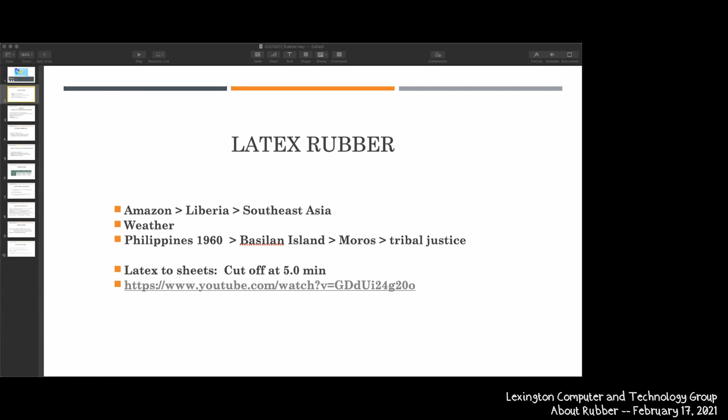And he's explaining to me on the way that one of the girls has been attacked by one of the boys. And she was, in fact, raped. And before we could get to the trees, they had taken him. They had amputated, castrated him, fed it to him, tied him to a tree, and he had bled to death. So that was tribal justice.

And that memory of that particular instance tells me volumes about Americans engaging in foreign policy.

Now, the purpose of all this is to get the latex into sheets. And when you see this brief video, one of the things that we'll talk about afterwards is that rubber basically comes from the plantation into the manufacturing sector in sheets, and they are either latex, still liquid, or they come in as number one sheet, number one smoked ribs, number two smoked ribs, or number three smoked ribs. And once upon a time, I was authorized to grade sheets. So let's see this brief video.

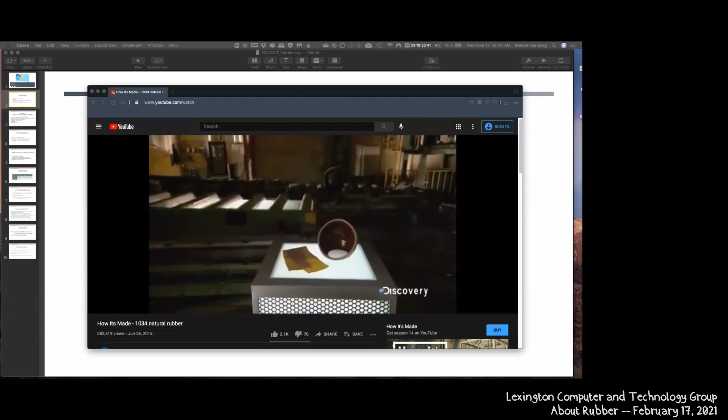Go full screen. Natural rubber comes from the milky sap of a tropical tree. Thousands of years ago, the native people of Central and South America discovered that the hardened sap was elastic and bounced. They played games with the balls of sap. When European explorers came along, it was soon a whole new ballgame. Today, we make thousands of useful things from the fluid that circulates through rubber trees. Everything from tires to balloons to boots.

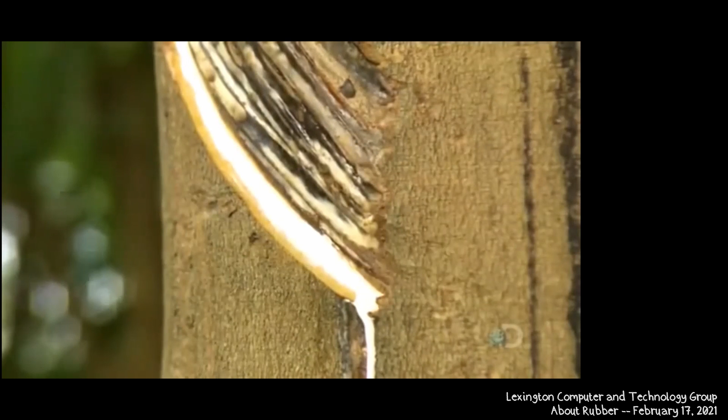The seeds are sown on plantations like this one in Thailand. It takes several years for the rubber trees to mature. Then the sap is ready to tap. In the coolness of the morning, when the sap flows freely, the farm worker slashes the bark with a hooked blade. The sap oozes from the abrasion. It spills onto a metal spout inserted below the slashed section. The spout funnels the sap into a ceramic cup below. It flows for about 5 or 6 hours, partially filling the cup. They wait a couple of days for the tree to recover and then tap another section of the tree.

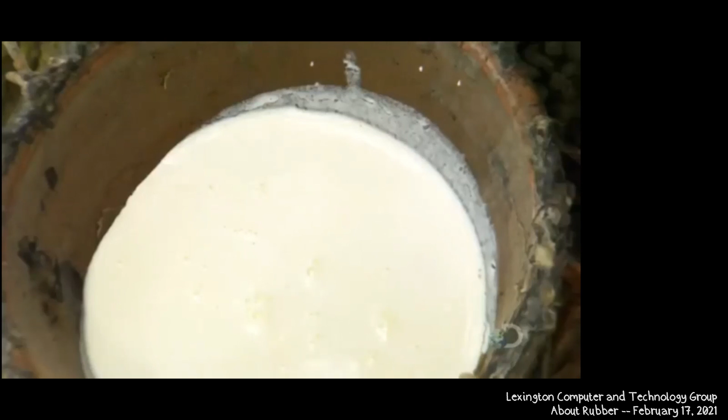After straining impurities, they pour the rubber sap into a plastic tub. They add formic acid and squish it around. The acid causes the sap to coagulate. After 15 to 30 minutes, it thickens to the consistency of tofu. This tofu-like sap has a sticky structure that allows it to now be rolled out like dough.

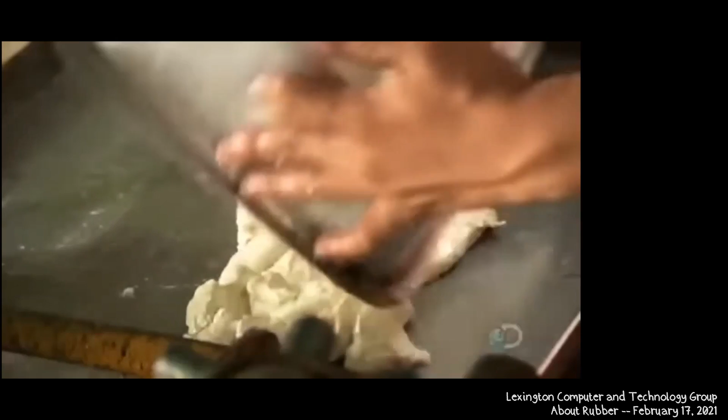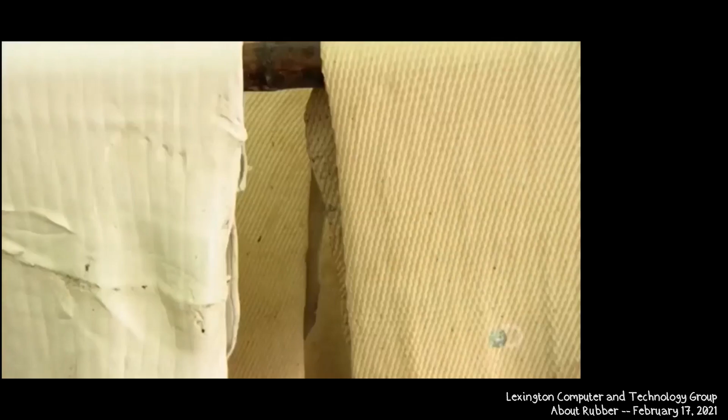The rolling squeezes out excess water and leaves a ribbed pattern on the sheets that increases the surface area to hasten drying. Then they rinse off the formic acid. They hang the rubber sheets to dry for about 5 hours. As they dry, the rubber thickens and becomes stronger, and the color darkens. The coagulated rubber sap has been transformed. In a few short steps, it's gone from a liquid to a solid.

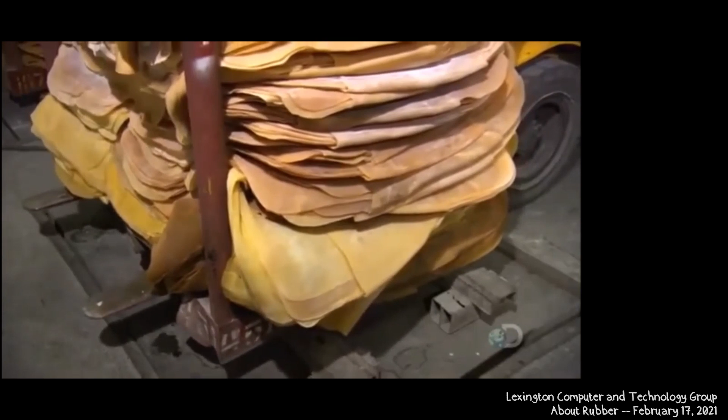Workers pile the rubber sheets onto pallets and weigh the load. There's a little over 1.5 tons of rubber in this stack. They store the stacks in a warehouse until the next stage of processing. When they're ready to move on, workers peel each sheet from the stack and soak them in water for about 20 minutes. This washes away some of the surface contaminants, but not all.

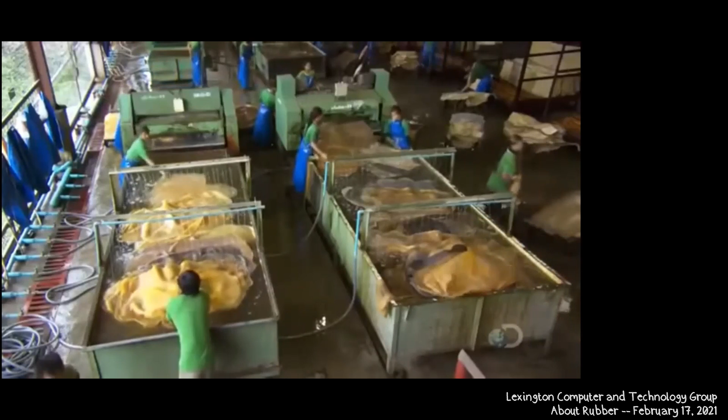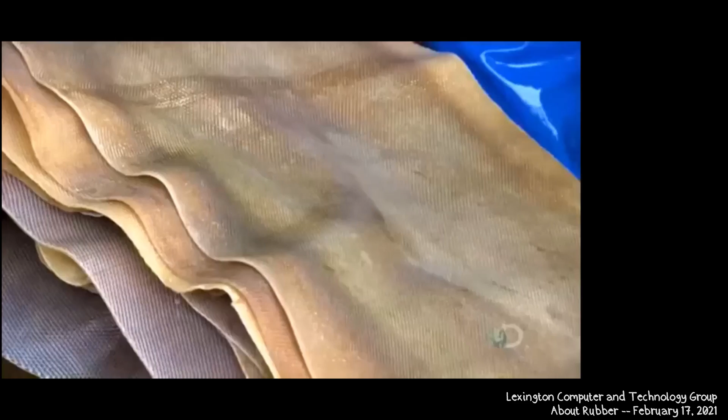The rubber sheets then go into a machine with many brushes that scrub off more of the dirt. After one more rinse, the rubber sheets are squeaky clean. As you can see, the color of the rubber sheets varies somewhat, depending on the tree they came from, their thickness, and other factors. They hang the sheets on racks to drip dry.

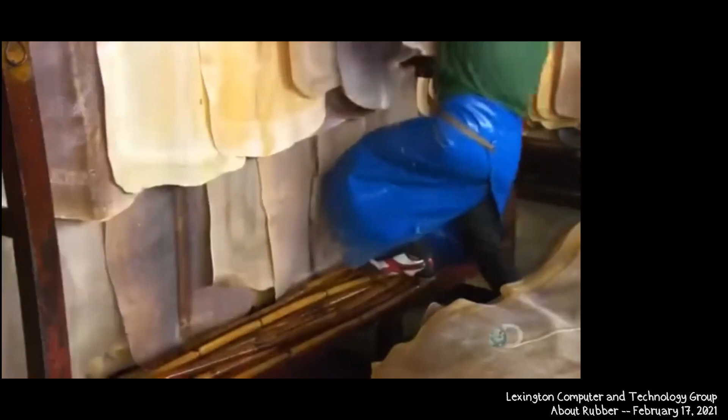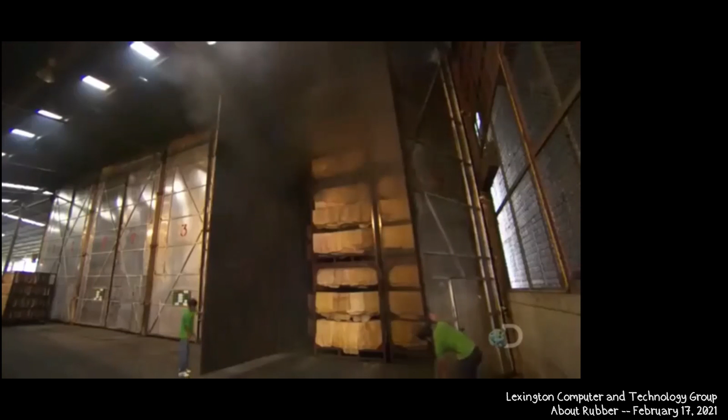They build a fire in a brick oven and smoke the rubber sheets in a chamber overhead for 5 days. It's a slow, low-temperature smoking that preserves the sheets to prevent the growth of mold. After smoking, they clip out contaminants like bark or insects that have become embedded in the rubber. In many cases, they can't get it all.

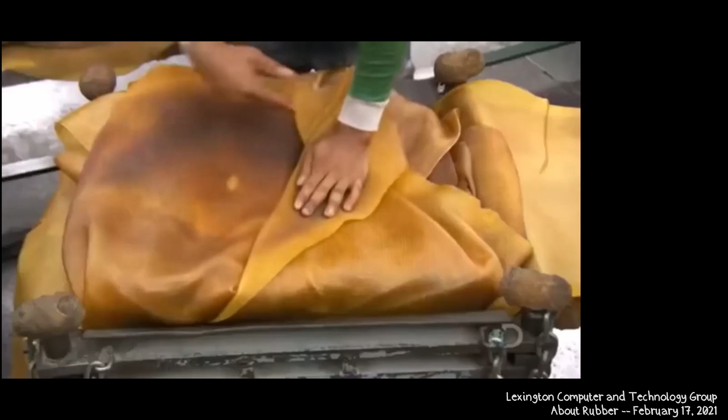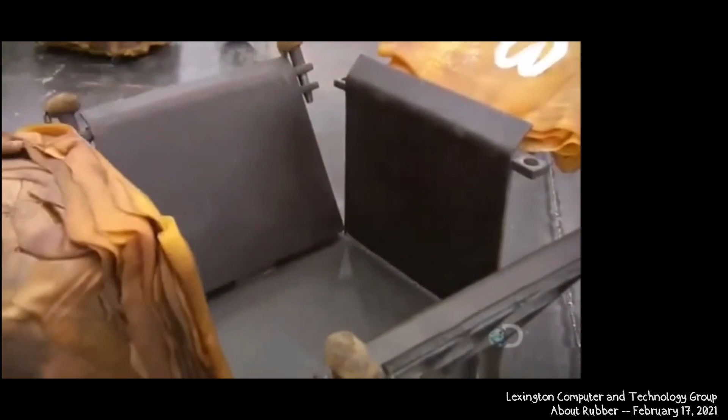They grade the rubber sheets by examining them against a bright light. Sheets with fewer remaining contaminants receive a higher rating and will command a better price. They stack the sheets according to the grade. And then it's into a hydraulic baler. It presses the stack of rubber sheets into cube form. The dimensions of the cubes conform to international packaging regulations, so they'll fit neatly into containers for shipping.

They spray the rubber cubes with a mix of calcium carbonate and solvent. The mixture forms a film on the cubes that prevents mold and keeps them from sticking together during transport. This rubber is now ready for the next factory and the next transformation. It could become almost anything.

George, what's the yield per tree per year? Oh, I have no idea. Okay. I just don't. If I ever knew it, I've long forgotten. Looks like they get 60 tappings a year from a tree, and what do they get? A pint a day. So that must be about 19 pounds.

George, you said earlier that the rubber was found in South America, right, and that in World War II, the difficulty was that the rubber came from the Far East. Does that mean that commercial rubber no longer came from South America? No, very limited. I don't know the difficulties of bringing the rubber out of the Amazon or why, but we were focused on the plantations in Southeast Asia by that point.

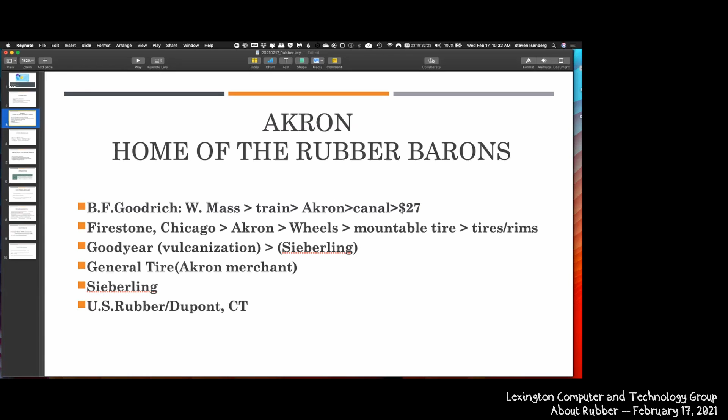So, George, to what extent do we use artificial rubber from petroleum? Pardon? I understand that we make artificial rubber from petroleum. Correct. To what extent, when we buy a tire or something like that, is it that rubber from latex or from petroleum? Okay, I will be getting into this in some more detail, but latex becomes what you consider rubber. Synthetic rubber can come to you almost the same. And most tires are blends.

So in the 1960s, when I was thick in this business, Akron was the home of the rubber industry. And the origin of that is right here in Massachusetts, because Benjamin Goodrich had a plant in the Springfield area of Massachusetts, and he wanted to expand. So he was on his way to Manhattan to try to raise money, capital, to expand his operation in Western Massachusetts.

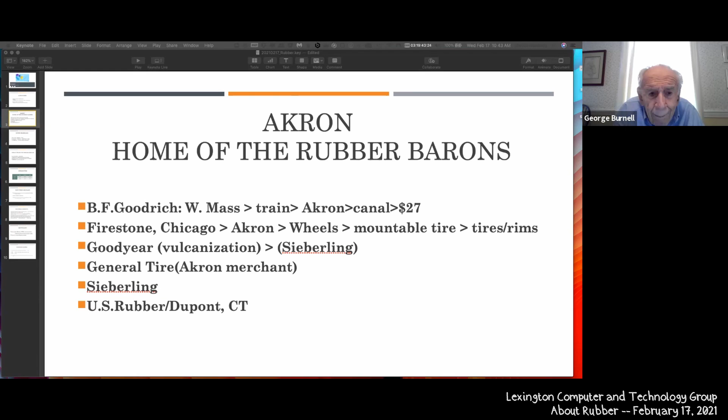So as this business develops, Firestone and Edison become personal friends. They're both developing, they're both scientific, and Ford. And those families go camping together in the Adirondacks. Goodyear ends up developing a relationship with the Chrysler Corporation.

And during the crash from 1929 to 1933, Goodyear delivered tires to Chrysler without getting paid for them for 4 years. Goodyear didn't start getting paid for those tires till after 1933. But when Chrysler put a car on the road, it had Goodyear tires on it. When Ford put a car on the road, it had Firestone tires on it.

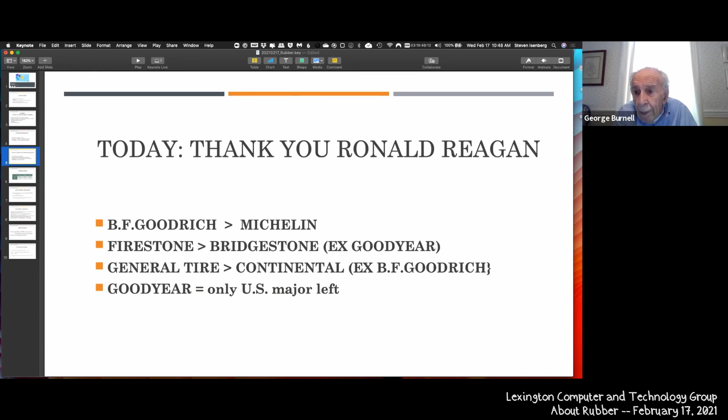So Bridgestone is ex-Goodyear, and we competed against those in the Philippines. Continental was the ex-BF Goodrich subsidiary. I was the tech rep to there. So that's gone. And Goodyear is the only major U.S. rubber manufacturer left. Next.

So there was a little saying in the industry, I had to slip it in here. But at that point in time, not today, but when I was there, Goodrich developed it, they had the strongest R&D in the industry. Firestone cranked them out. They made them. And Goodyear had the best sales organization. They could sell anything.

Now, the automobile that matched that, and the saying went, Chrysler designs it, Ford produces it, and General Motors can sell it. Yet during the development of the industry and the vehicle, the auto, and this is heavily the tire portion of this rubber business, Chrysler was out there first with various engineering activities, the airflow, the brake systems, front end drive.

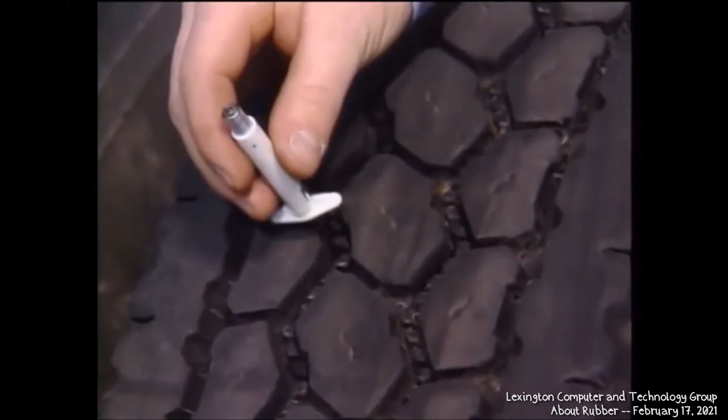Today's radial truck tires are masterpieces of applied technology. They have to start, stop, carry, and turn thousands of pounds of truck and cargo at speeds up to 75 miles per hour. And yet we also expect them to last for hundreds of thousands of miles. And we expect to retread them, a form of recycling, to make them last even longer. How can a tire do this? What gives it the extraordinary strength and staying power it needs? To find out, we'll look at what's inside it. Then we'll see what goes into the making of a modern truck tire. We'll start at the outside.

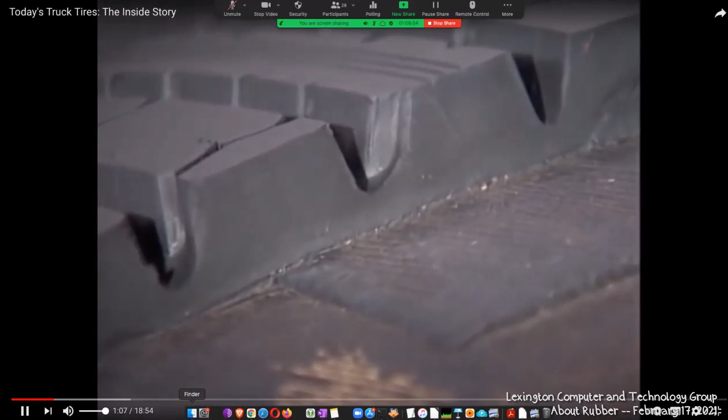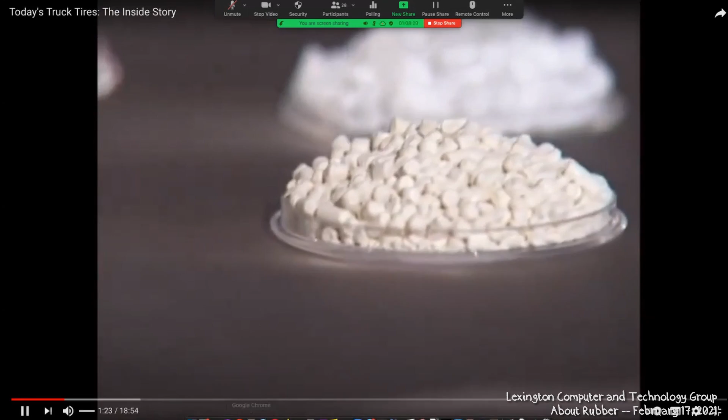The tread, of course, is a thick layer of rubber with a tread pattern molded into it. The rubber is application specific. That means each rubber compound is chosen for a specific combination of qualities, like fuel economy, wet traction, and cut and chip resistance. Treads are often a blend of natural and synthetic rubber because each has unique, desirable performance characteristics. Different additives, polymers, and other components provide strength and resiliency, along with resistance to wear and heat. All are combined, then cured in molds at high temperatures, changing the materials, bonding them together chemically, and forming the tread. The tread pattern is designed to optimize traction and wear. It must grip the road, wet or dry, because the tire controls the traction forces for the truck.

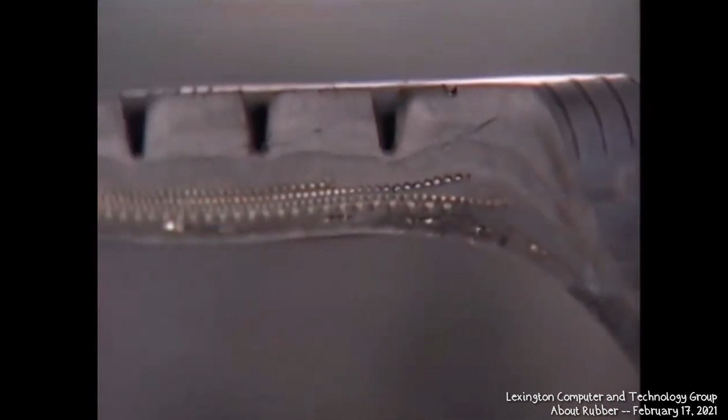But even a tread isn't as simple as it looks. When we cut through it, we see different shades of color in the rubber. Why is that? Well, in most Bridgestone tires, 2 different layers of tread rubber are used. Each has a slightly different color because each has a slightly different composition. The top layer, called the cap, is designed for long, slow, even wear. The layer below, the base, is designed to shield the casing from heat generated as the tire rolls down the road. Heat is the enemy of tire casings, shortening their life. Because retreadability is so important for truck tires, heat must be controlled, and that's why cap and base construction is so important. As we dig further, we find a layer of rubber called the undertread. The undertread provides additional protection for the casing and also helps form the bond between the tread and belts. Different thicknesses of undertread are used, depending on the amount of off-highway service or regrooving required.

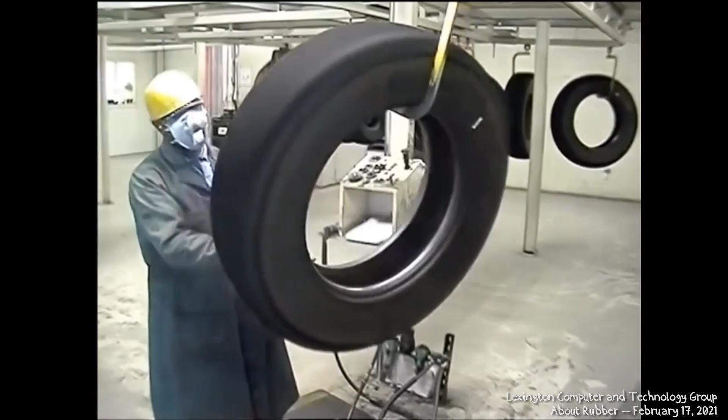From this point on, we're looking at what we call the casing. This is the part of the tire that gets retreaded once the original tread is worn away. Below the undertread, we find layers of steel cables and rubber. There are usually 3 or 4 of these belts and a body ply in a Bridgestone truck tire.

The job of the belts is to hold the tread flat against the road. Without them, the casing would take on an inner tube-like shape. Footprint pressure would be uneven, and the result would probably be poor traction, poor stability, plus rapid and irregular wear. Steel belts also help tires resist penetration by nails and other road hazards.

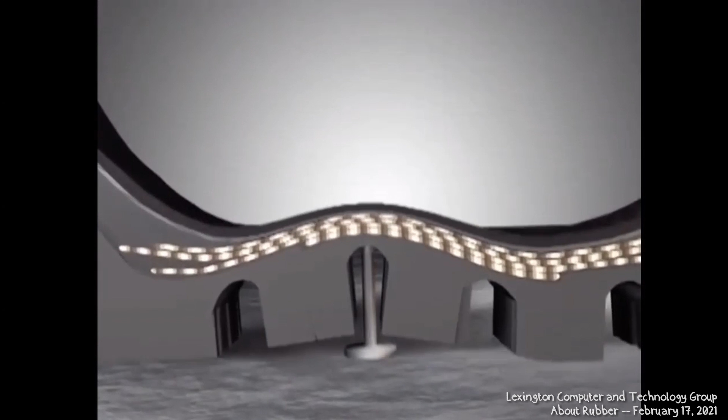The cords in each belt run at different angles. That distributes forces evenly and provides great strength. Like the rubber, the steel cord is application specific. Different alloys, different tensile strengths, along with different ways of winding the cords, are used to produce exactly the performance characteristics needed in each part of the tire.

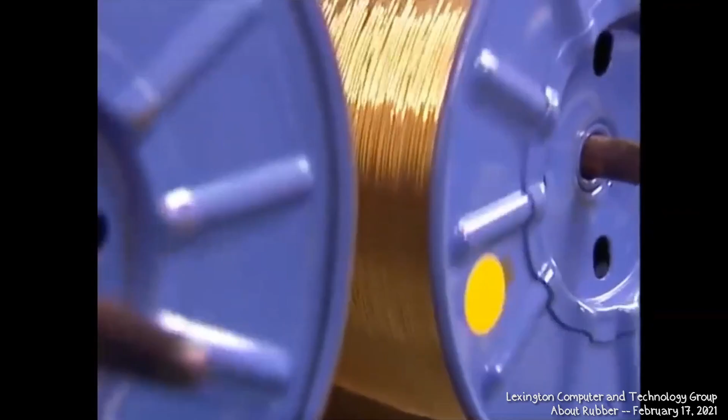Both steel and rubber are specially made to help them bond to each other. Steel is treated with the metal cobalt and brass formulations to help the steel and rubber bond tightly. The rubber that surrounds the steel cords maintains cord spacing and seals out moisture that could cause rust, which could break the bond with the rubber.

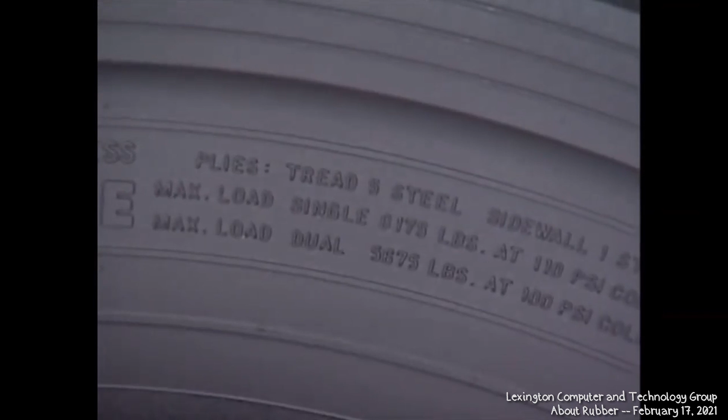And steel adds enormous strength. Long ago, a 14-ply rated tire needed 14 cotton layers. Today, just 3 or 4 steel reinforced layers in the belt package, plus 1 layer of body ply cords, do the same job. Beneath the belts, we find another combination of rubber and steel.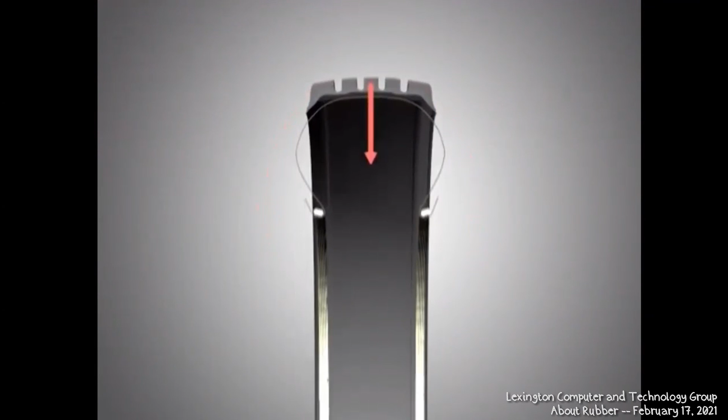We notice that these steel cords run at right angles to the tread, and they run radially down the sidewalls of the tire. It is this cord direction that gives the radial tire its name. If you draw a line from the center of the wheel to the tread, a radius, you see that these radial lines match the steel cords, hence the name radial tire.

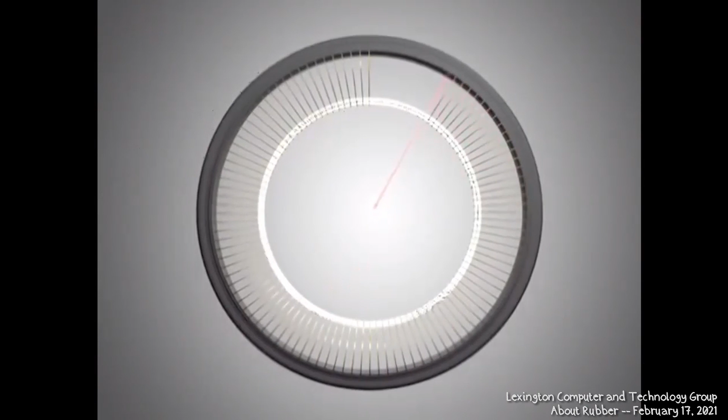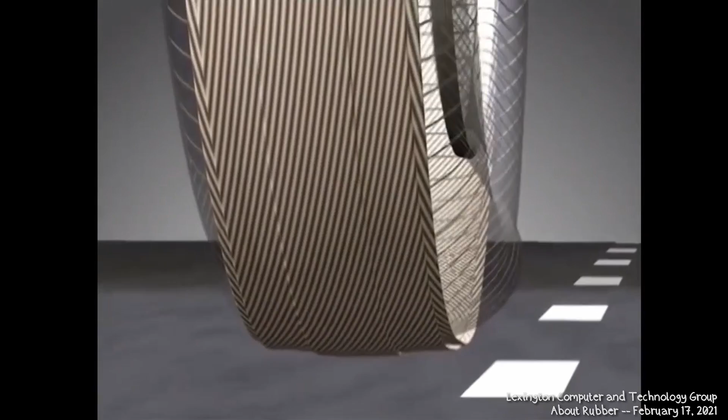As a group, these radial cords are called the body ply and run all the way around the tire. A typical truck tire has approximately 1,200 of these. Each cord runs from bead to bead. As it does, it forms part of the sidewall. The sidewall does most of the flexing as the tire rolls. Sidewalls flex about 500 times per mile and hundreds of millions of times over the tire's life.

By flexing and changing shape, the steel, together with the compressed air inside the tire, helps absorb shocks from uneven road surfaces. The sidewalls transmit steering, driving, and braking forces from the wheels to the tread, as well as forces from the road to the suspension system.

Although sidewalls don't get the kind of wear treads do, they are exposed to the elements. So sidewall rubber uses special compounds and special additives to protect it from UV light, weather, aging, and curbing. As the body ply cords continue toward the bead of the tire, they suddenly turn completely around the bead and start back up the sidewall. This is called the ply turn-up because the cords actually turn up and head back the opposite direction.

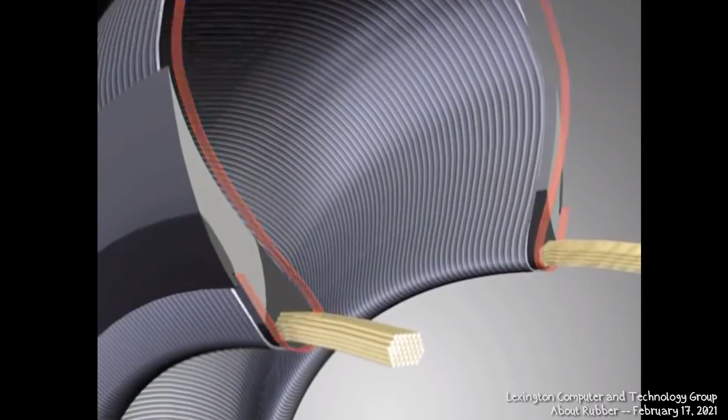Inside the turn-up is a band of many strands of steel wire called the bead bundle. The body ply wraps around it. The space between body ply and bead contains several different kinds of rubber and fillers. Each is formulated to add strength while giving the area stress resistance.

The bead is the edge of the tire, you might say, the place where the tire makes contact with the wheel. The bead creates a tight seal between tire and wheel. Since the entire inside of a tire is open, it is the compressed air that forces the beads against the wheel flanges, sealing in the air.

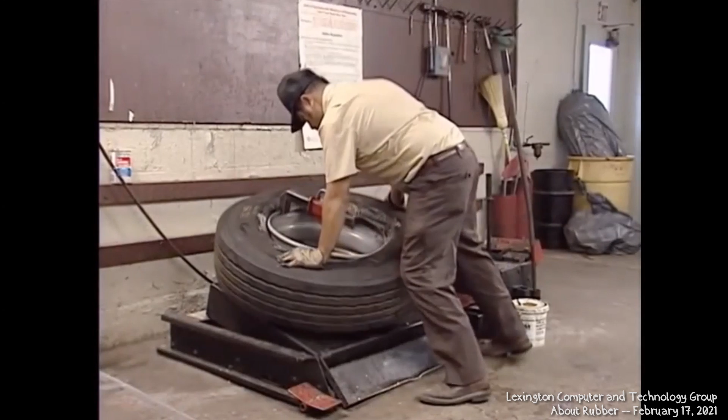There's also a small additional component made of wire or wire and fabric called a chafer. It covers the bead bundle and ply turn-up. It provides protection against damage that might occur when the bead is forced over the edge of the wheel and as the bead moves against the rim flange. Also protecting the bead area from abrasion is a tough rubber compound that helps make beads more rigid for further damage protection. But we have one more component to go.

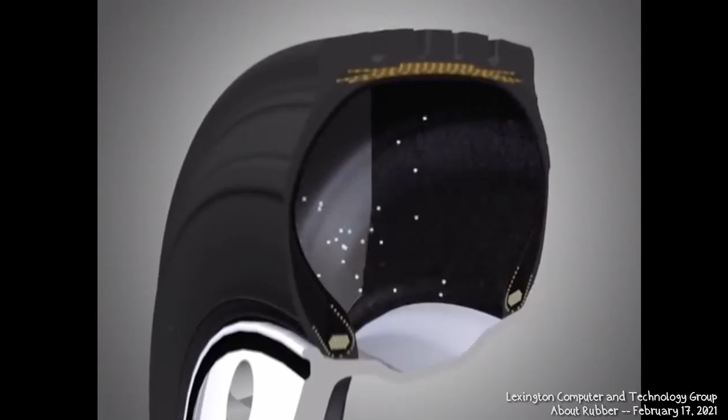Air molecules are tiny and can literally diffuse through rubber, causing the tire to lose pressure. To slow this, the inside of the tire is covered with what is called an inner liner. This is yet another layer of rubber. Though it's thin, the inner liner actually has 2 or 3 separate layers. One layer prevents air and moisture from passing through. The other helps it bond to the casing ply. 2 more rubber compounds, each with a specific job.

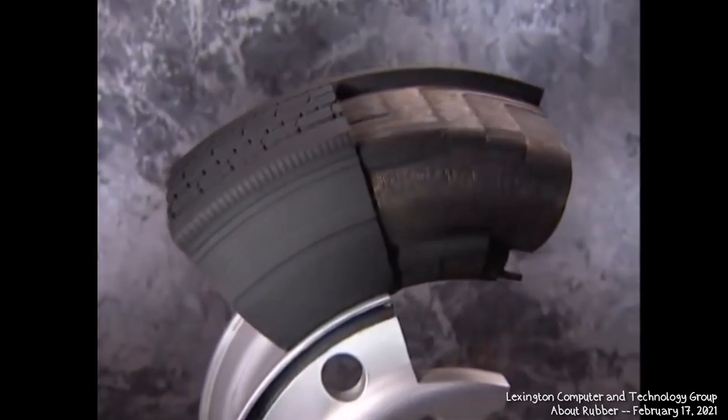Still, even with the best inner liner, a tire can lose 2 psi per month. Another reason to check inflation pressures regularly. We've seen all the major components of a modern radial tire. Now, how is a tire like this actually produced? To find out, we'll visit a Bridgestone Firestone truck tire factory.

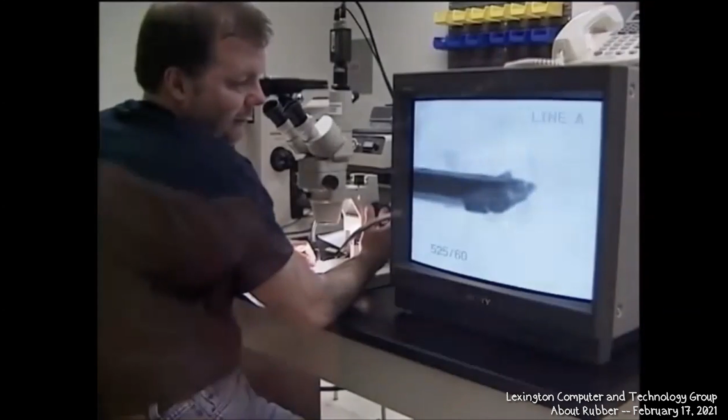As we've learned, the basic materials are rubber and steel. About 70% of the rubber in a truck tire is natural rubber, which comes from the sap of rubber trees. About 30% is synthetic, made from petroleum and other materials. Specially made steel wire of a variety of types and thicknesses is used in the belts, body ply, and beads.

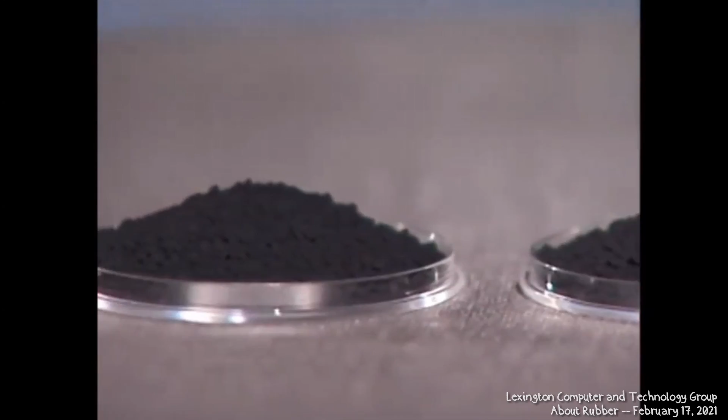And there are several specific additives used to help in processing, curing, and strengthening rubber, and in protecting tires against air, sunlight, and ozone. Silica, which is related to common sand, can be added to reduce heat and rolling resistance to improve fuel economy. Different grades of carbon black can also create different performance characteristics. And many secret ingredients can have almost magical effects on how a tire performs.

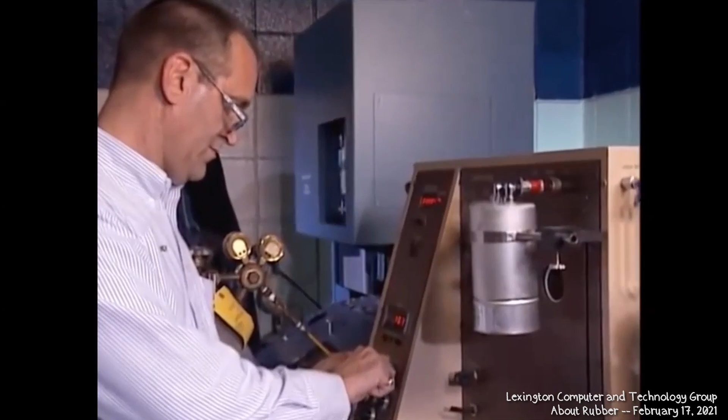Quality control begins with the incoming materials. Every batch of rubber, every bit of steel, every additive, even the water is tested, first by the supplier to make sure it meets Bridgestone specifications. Then it's tested again by Bridgestone Firestone technicians to verify its quality.

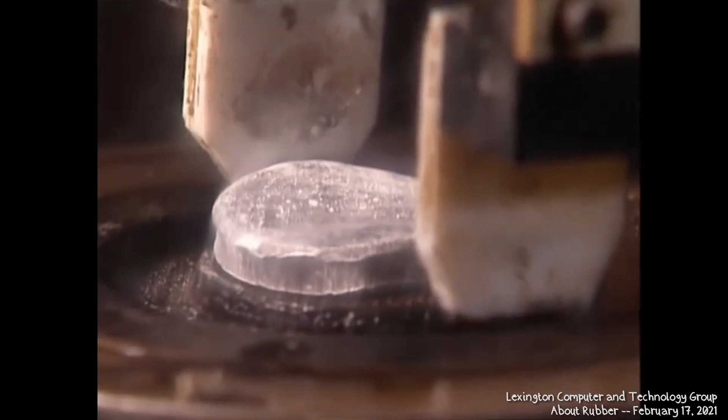And as materials go through the process, they are tested repeatedly to make sure they will perform properly in the finished product. Both chemical and physical properties are checked. We need not only the right materials, but the right strength, flexibility, size, and other characteristics. Nothing can be used to build a tire until it has been tested and approved.

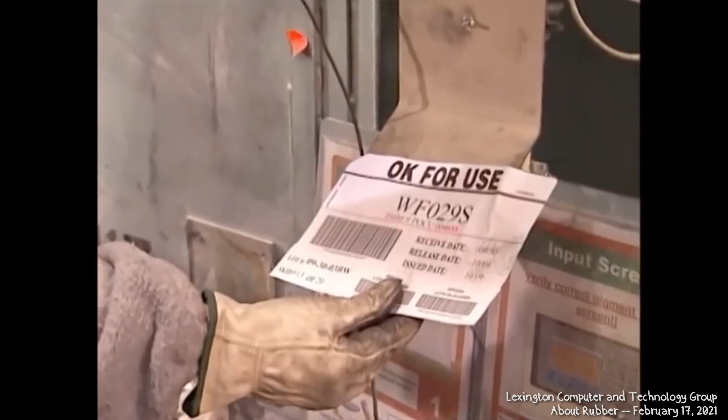Each of the many different rubber compounds is mixed separately. Careful weighing assures precise formulations. At this stage, though, rubber is tough stuff. To mix a batch, you need powerful mixers. These Banbury mixers have 4,000 horsepower motors, enough to power more than 10 semis, and can handle half a ton of rubber at a time.

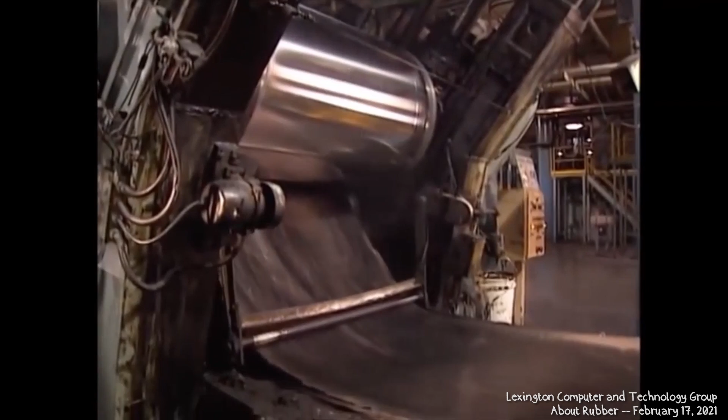Once rubber leaves the Banbury, it is squeezed between heated rolls called mills. It comes out of the mills in sheets, which may be put back into the Banbury again and again, depending on specifications set by the chemical engineers. And this has to happen for each of the different compounds used to make a tire.

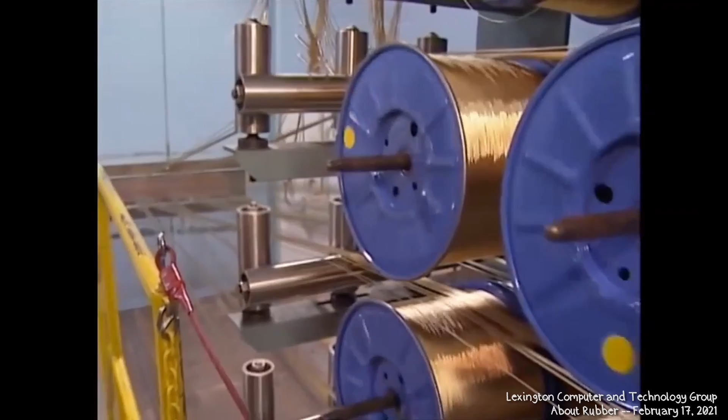Steel is used to make body plies and belts. Multiple strands of wire already wound into cords must be aligned and bonded to rubber. Nearly 1,000 strands pass through guides before being sandwiched with rubber in a machine called a calender. Powerful heated rollers press rubber onto and between the cords. The result is a sheet of steel-reinforced rubber. These sheets are then cut at the precise angles needed to make body plies and belts.

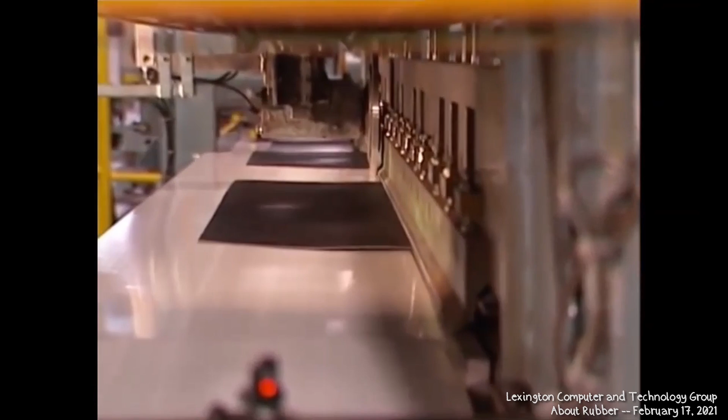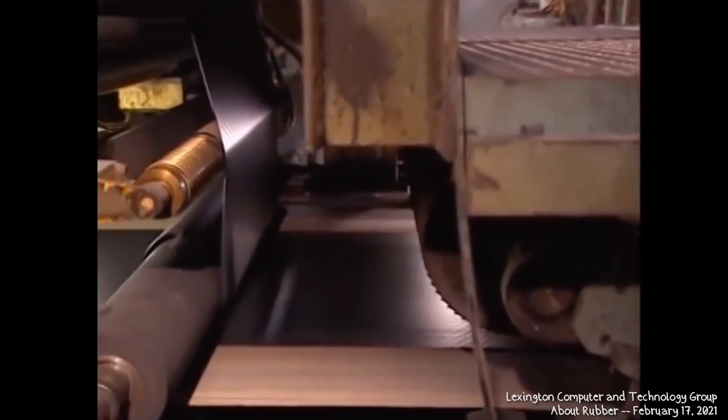Quality control continues in every part of the process. Throughout the plant, giant poster-like charts provide operators with checkpoints for each step in manufacturing. Every critical step is checked and verified before work can proceed. The inner liner, another sheet-like material, is also made using a calender, but it contains no steel. And the other thicker wire will be coated with rubber and wound into sturdy rings that become the beads.

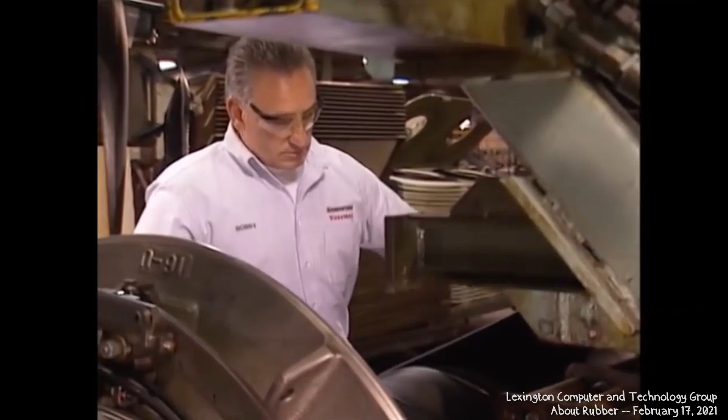Many rubber components are made by extrusion. The largest of these extrusions is the tread, but many smaller ones are used in making parts of sidewalls and fillers. Up to now, we've been making parts that will be assembled to make the actual tire. A person called a tire builder assembles these parts using a tire assembly machine. This is the heart of the tire manufacturing process.

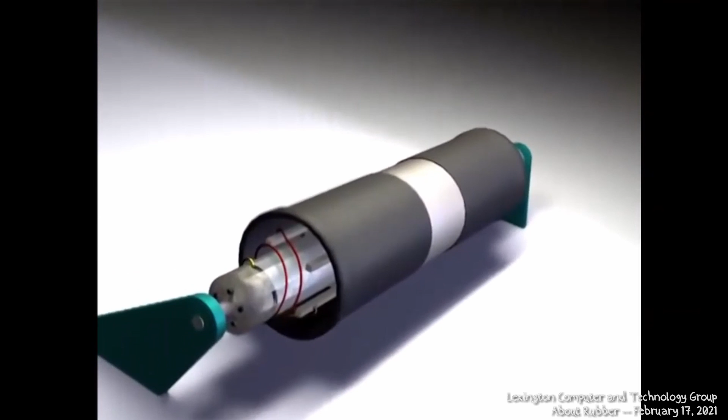Every component is identified and tracked using barcodes. Specifications in computers at each building machine make sure only the right components get used. To make what happens as clear as possible, we'll use animation to simplify and slow down the process. Basically, the parts are laid out on the surface of a big drum.

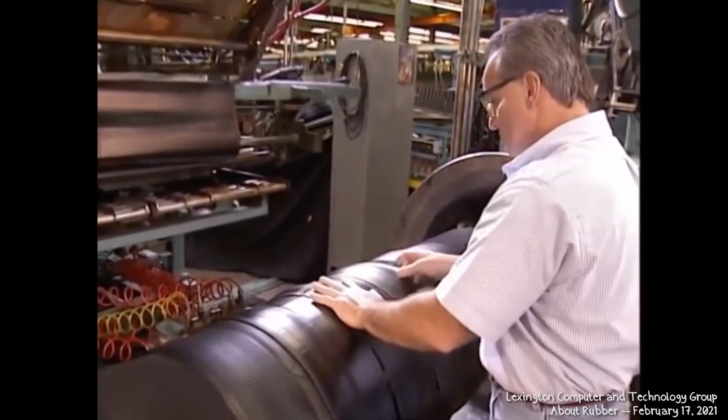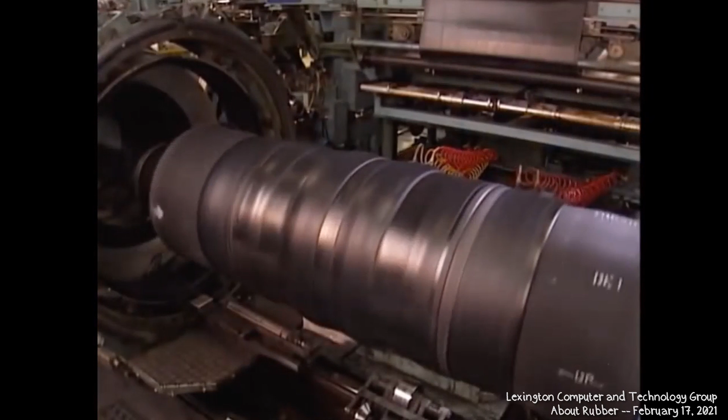We begin with the wire bands that form the beads. The sidewalls go on next. Then the inner liner is added, followed by the chafers and body ply. With the exception of beads, each of the components has to be matched end for end and spliced together. But it still doesn't look much like a tire. That's where the magic of the tire assembly machine comes in. A bladder inside this new tire is inflated. Then the belts are put into place.

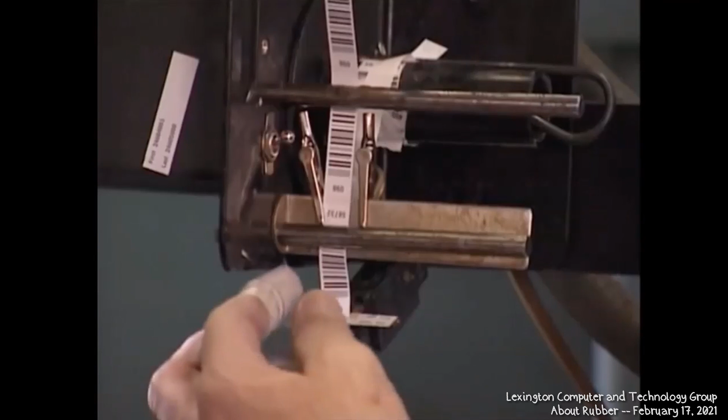And finally, the tread is attached. Bladders on each side inflate, pushing components into the characteristic tire shape. The sidewalls and body ply ends are folded around the beads and pressed firmly against the sides of the tire. A barcode is applied, identifying this tire, the operator who built it, and every component in it, so any irregularity can be tracked back to its source.

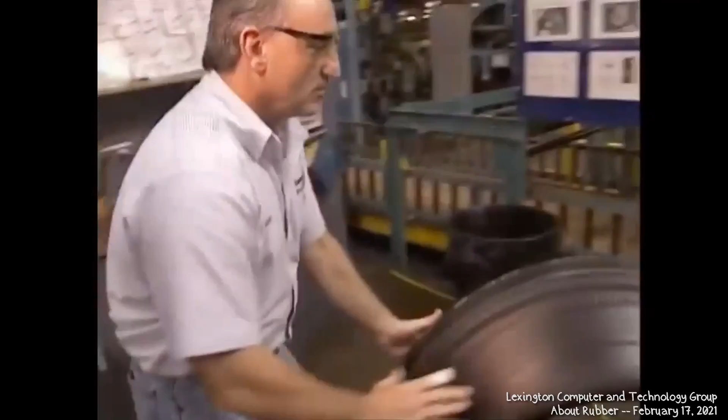Special rollers press all the components together, a process called stitching. Because the rubber is still uncured, the various parts are soft and stick together easily. The result is something that looks remarkably like a tire, but it's not cured, so we call it a green tire. We still have to create the tread pattern and sidewall design and vulcanize the components. That's done by giant heated presses that contain the molds.

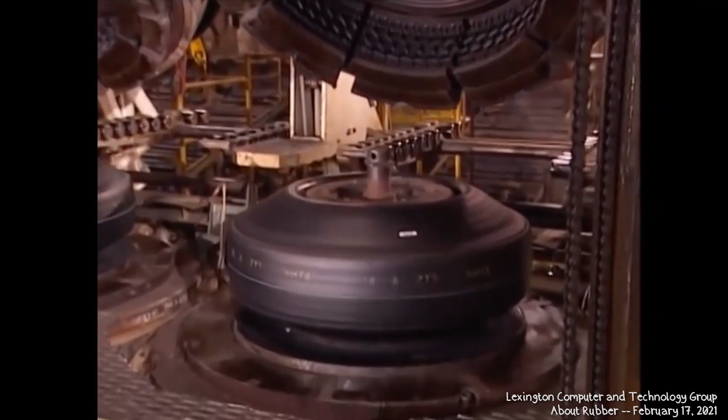The green tire is placed inside the mold, and pressure is applied from the inside. As the mold closes, the tread segments slide toward the tire, forming the tread pattern and shaping and finishing the outside. Inside the air cavity of the tire, a rubber bladder, sort of like a big inner tube, inflates to press the inside of the tire against the mold.

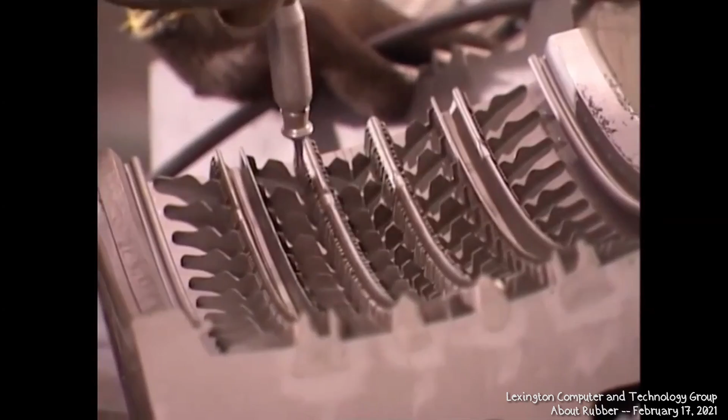Molds are incredibly precise and very expensive, $50,000 to $70,000, as much as a small house. And you need separate molds for every tire size and every tread pattern. For popular tire designs, you might need dozens, even hundreds of molds.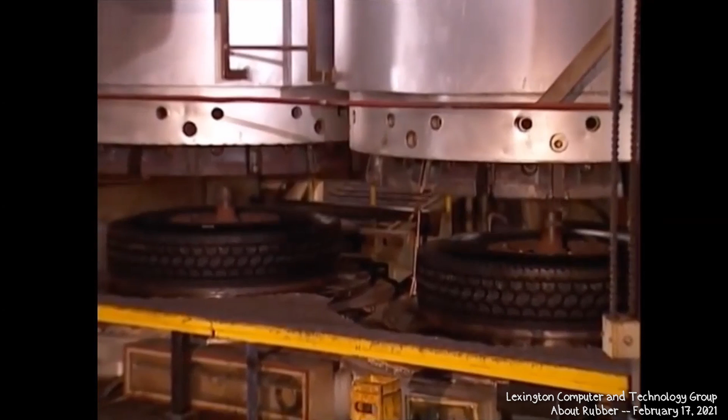Green tires are heated at precisely programmed temperatures and pressures for precisely controlled time periods. High-pressure steam provides the heat and sometimes is also used to generate electricity, reducing both power bills and pollution. The process is called curing or vulcanization. It bonds the components of the tire together, forming chemical links between rubber molecules. Curing changes rubber from something sticky and soft in summer and stiff and hard in winter into a tough material that provides remarkably predictable performance year-round.

Once the tire is cured, you might think it's ready to use, but there are a few more things to be done. Quality control, which has been continuous throughout manufacturing, now looks at the finished product. X-ray machines see steel cords inside the rubber to make sure they are properly aligned and properly spaced. Any tire that doesn't meet specifications is scrapped and may be recycled as clean-burning fuel, or may be made into flooring or even asphalt.

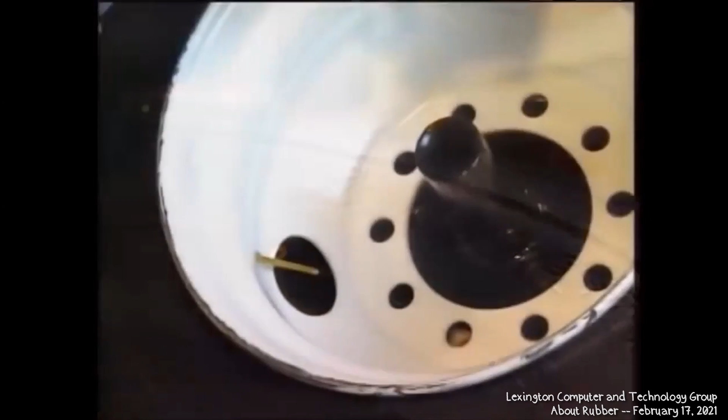In addition, each tire is checked for balance. This machine marks the light static balance point of each tire with a yellow dot. This makes achieving initial static balance easier when you mount a new tire. Again, if the tire is outside specifications, it is scrapped. Some tires are also marked with a radial force variation mark. Like the static balance mark, this helps reduce ride disturbance by helping you mount the tire for minimum vibration.

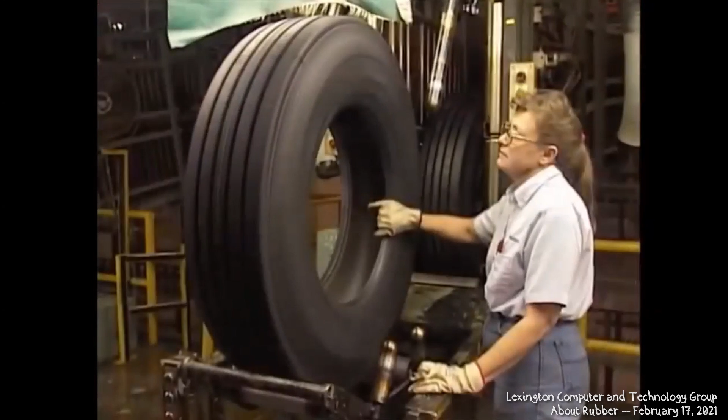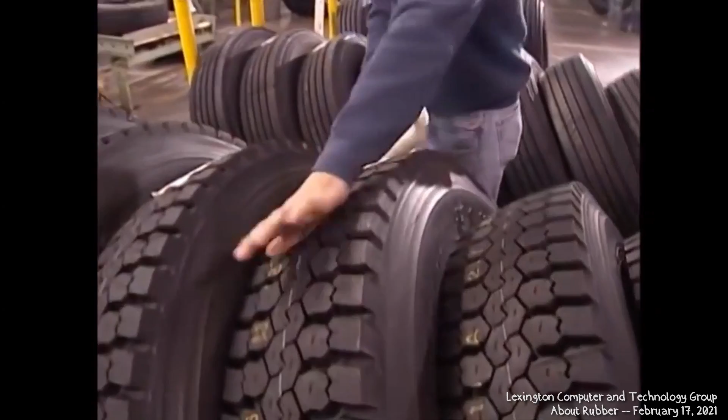And skilled operators examine each tire by sight and touch for quality. They give each tire the final okay to go to you. Tread patterns and sizes are sorted, labels are applied, and the tires are sent to warehouse areas for shipment. At this plant, a robotic warehouse system stacks, stores, and retrieves finished tires to fill orders without requiring any human labor.

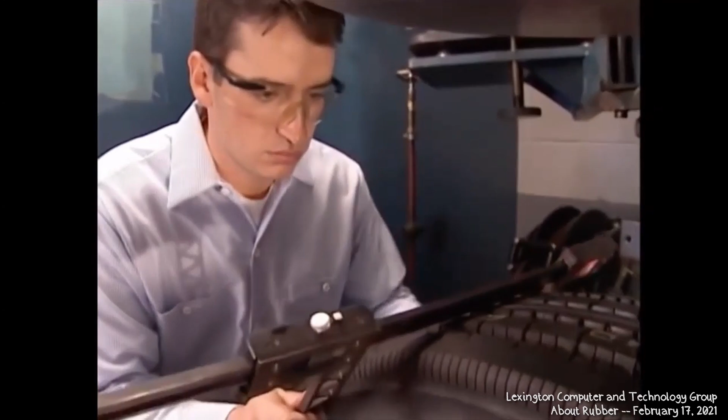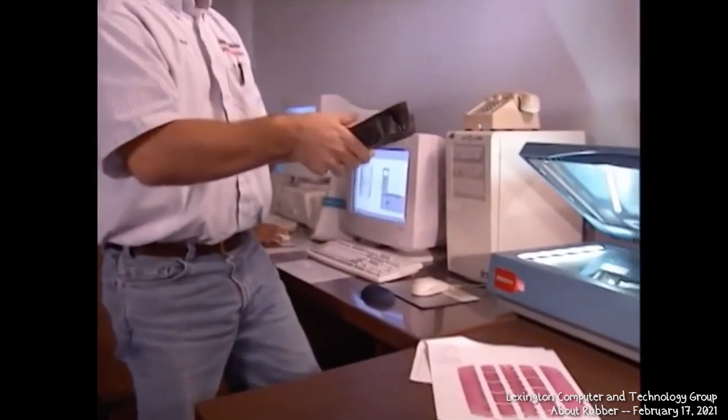And quality control still hasn't ended. Bridgestone Firestone technicians routinely pull random samples for testing. Tires are tortured on test drums, punctured by hydraulic rams, cut up and examined with microscopic precision. Technicians compare final products to specifications, looking for variations that could diminish performance, tread life, or retreadability. It can take weeks to test a tire, but it's an important job because it assures consistent quality.

And tires aren't tested only in the laboratory. At the Bridgestone Firestone Texas Proving Ground, tires are tested a variety of ways, including running on a 7 3/4 mile oval track, and put through tests designed to simulate the kind of abuse real tires get in the real world. If the tire is a new design, it will also be given extensive field trials before being released to customers. Only when a Bridgestone or Firestone tire passes all these tests is it ready for you. And even then, field engineers and sales representatives monitor the performance of tires on customer vehicles, paying special attention to anything out of the ordinary.

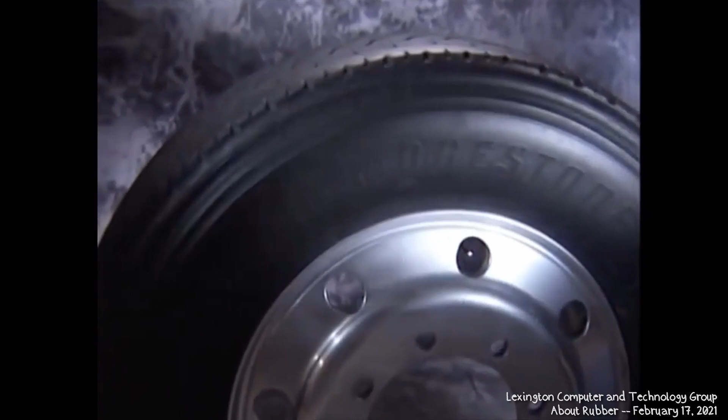The results are some of the finest truck tires available for virtually every application and every vocation. Truck tires with incredibly long life, extraordinary traction and handling, and that provide low cost per mile by maximizing retreadability. With good maintenance and careful retreading, some of these tire casings have provided their owners with over 1 million miles of service. So why do Bridgestone Firestone truck tires deliver such outstanding performance? As we've seen, it's the way they're made, the advanced methods and materials they're made of, and the people who make them.

So what we're going to do is we're going to finish off on tires and questions, and then we'll do the industrial products a different time. So

prior to making tires the way you've seen it, the sidewalls of tires were not made radially. They were made at a 45-degree angle or close to a 45-degree angle. So the fabric was crosshatched, and you would have a 4-ply tire that would be 2 plies going one direction and 2 plies going the other direction on the sidewalls.

And then radial tires were born in Europe after the war. But there were no rubber plants after the war. We bombed them out of existence. So they were all new plants. So they were making, like many other products, steel in particular, they were making tires with a different pattern. This was this radial pattern in Europe.

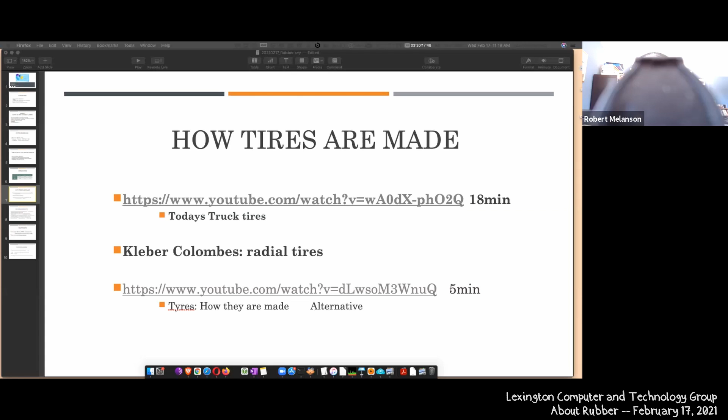Actually, George, I remember a period where the cost of tires went down quite a bit. When I was a kid, people would routinely ride around on bald tires because they were so expensive. And then a number of years later, people rarely did because the cost of the tire went down quite significantly, as I recollect. Do you remember that? This would have been from the 50s to 60s to 70s. No, I don't.

George, what makes the radial tire a better tire than the old conventional one? The biggest part of that is that, and I can get into this later this morning, but the enemy of a tire is heat. So when you are whizzing down the highway and you have 4 plies or 6 plies, or on a truck tire 12 plies of sidewall, as that tire turns, the sidewall is flexing. As it flexes, it is generating heat. So the more plies you have, the more heat you are generating.

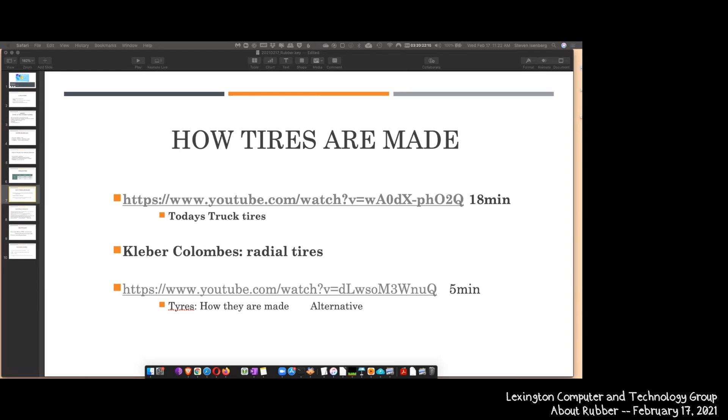Now the local streets have a tendency to have more building materials that get dropped onto them, like roofing nails. That's where I run into my problems. But I suspect, I have no data, that a lot of the flat tires were due to all these bottles. Yeah. Now we make a lot of plastic and put them in the ocean.

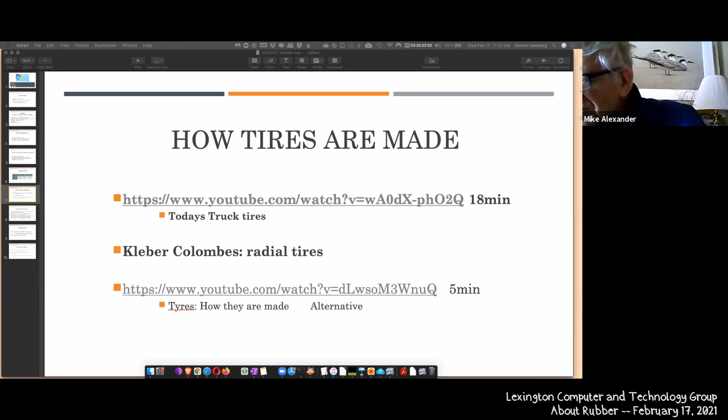Right. Well, you can still hit a curb. You can still hit a curb hard enough with a sidewall to blow your tire. I can tell you that from personal experience. I did that a year ago. Yeah, and bad mounting also. Or a pothole. As rims age, you start getting rim leaks. Now the other thing is the rims are getting really expensive.

George? I remember when the industry was trying to transition from the bias tires to the radial tires, there was some resistance in the US at least, because the radial tires looked underinflated compared to the bias tires. You remember anything about that? Yeah, the sidewall shape. Everybody said the tire's underinflated because it flexed. Right, exactly.

I still have that problem. I can't look at a tire and know what its inflation might be, whereas I used to be able to tell. Well, if the rim is on the ground, it's a sure tip off. I used to know what things cost, and I don't anymore. Well, with the radial tires, they actually had to start introducing sensors that tell you in the dashboard when you're underinflated, because you can't just look at it.